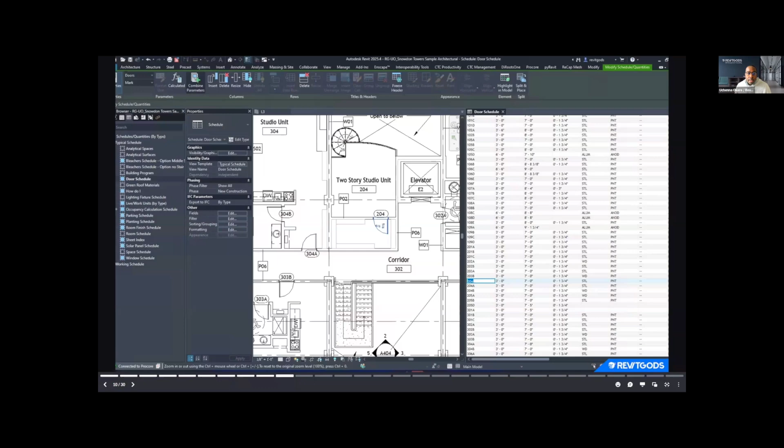So that's, I think, why there's this huge need to have some other tools come into play to make this actually successful. Because realistically, when we're in early stage design, many of you, if you went to architecture school or any form of design school, this is how we think. We normally sketch things out, we're developing things with our hand, we're touching material, and we do a lot of work before it gets into a computer. And then somehow that gets lost when Revit, which is realistically a data management platform, requires us to enter in all this data before we actually can get to our conceptual design. So there's sort of a bottleneck that's been created in the market, and we want to try to help solve a lot of that.

Because realistically, when we look at conceptual design or early stage design, there's so many factors we have to look at when it comes to site analysis, zoning, scope. There's many things we want to consider that Revit isn't necessarily the best at. But what we want to do is try to take some other tools and connect it to our documentation platform.

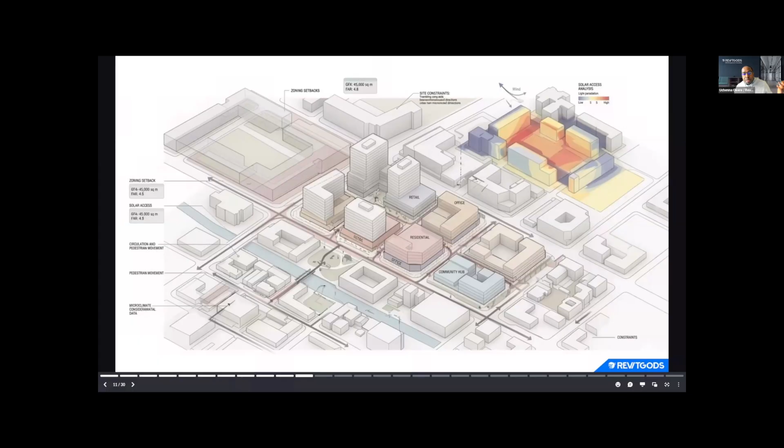Now, the good news is that Autodesk has made this huge pivotal shift in developing this platform called Forma. I went to AU last year, and they kind of hinted at this, but in recent months they took Forma and brushed it over all their products. So it almost feels like Forma is the King, the Conqueror. You see Forma across everything, so it's a little confusing about what Forma is supposed to be. Let me just do a quick breakdown of Forma for everyone here today.

So first off, Forma is designed to be an end-to-end platform to connect planning, design, construction, and operations. There are a myriad of products that Forma provides. Before, each of these products had different names associated with it. Some of these products are included in your AEC collection license already, which is one of the reasons why we thought it was important to do this webinar, because we want people to get the most out of their current subscriptions. So if you have a subscription, Forma Site Design, which we're going to talk through, and Forma Building Design is included in your AEC collection subscription, and you should also have access to Forma Carbon Insights. So these three will be included in your subscription.

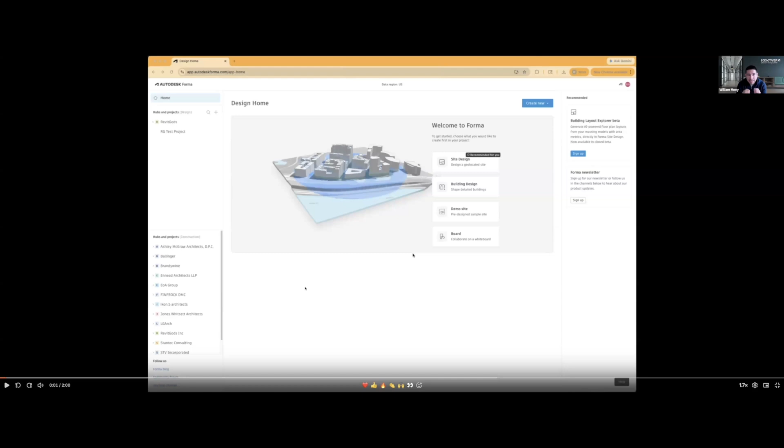While I break down Forma, one thing to note is how to get there. It's browser-based software, so you'll navigate to app.autodeskforma.com. You might have to log in with your credentials, but after doing so it should bring you to this page here.

Site design and building design kind of work together. Once you have a project created, you'll be able to see any of your design iterations located here as well. With that, let's get into site design.

Site design is really going to be more about that urban or master planning, large scale view from a design standpoint. You start off by specifying your general area where you want to place some massing.

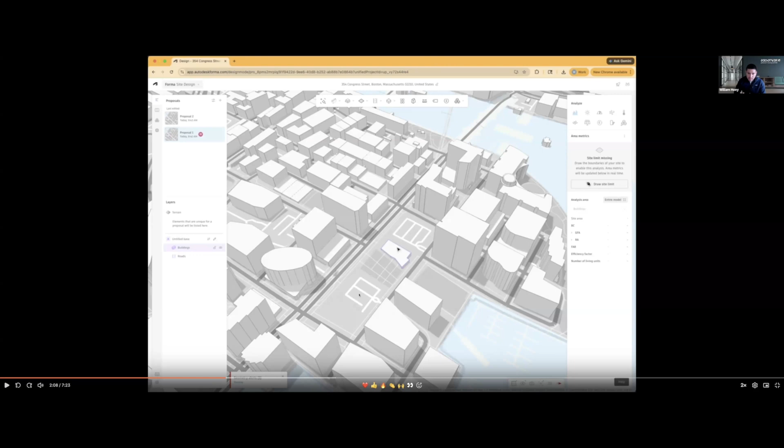One of the great features we'll explore today is the site automation feature, but you also have the ability to just place in some general massing if you want. You can also import various file types, although you can't import a Revit model directly—you'd have to save it out as an IFC file or something similar, just as a heads up.

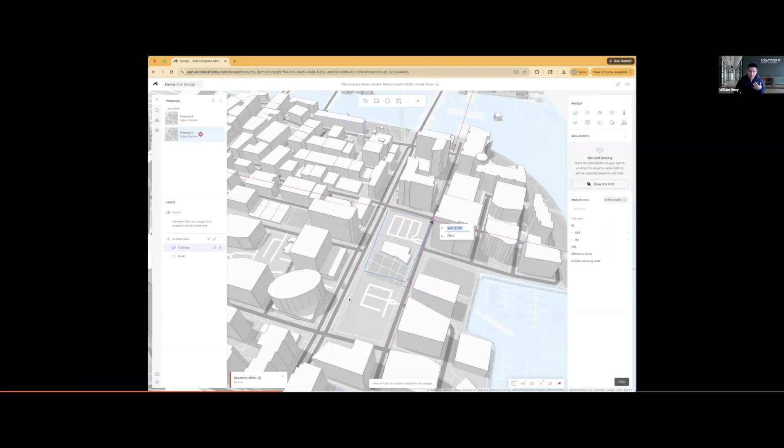One feature that really stood out to me was this site automation tool. The first thing it asks for is your overall site boundary extents—whether you're tracing over a property line or just a generic outline of what your site might be. As soon as you do this, it begins to place options for massing and how the site might break down.

Automatically, with this you can begin to control via the nodes how the shapes of these massings behave relative to each other on the site.

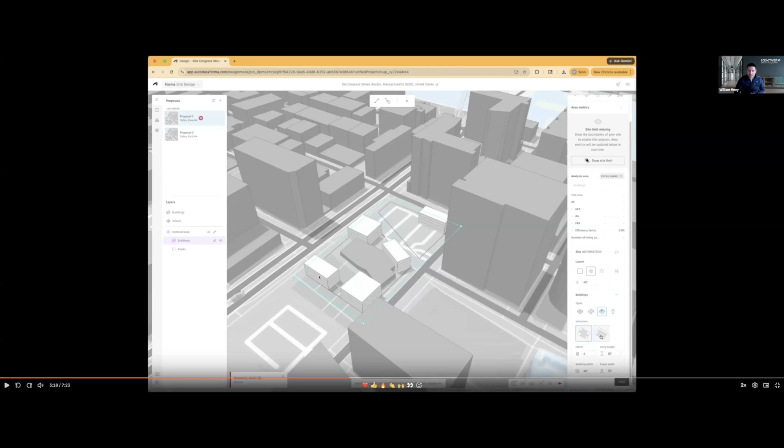You'll also have this panel on the right, which can cycle through various building types that Forma has. It gives you a mixed feature, a longer linear building, a tower option, or a mixed option of the two. You can also add more nodes if you'd like to get even more specific.

Or you can drag any of these boundary or perimeter lines to adjust some of the massing here too. You can also specify the story height, the floor height generally speaking, and the building width—again specifying building versus tower.

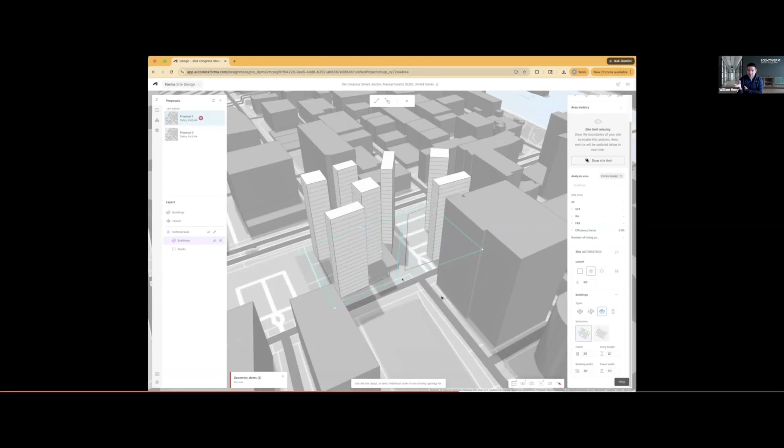Depending on which layout type you choose, you can specify the width there too. So again, it's a really quick and easy way to play around with various automated massing on your site, just to see what some options might be. Of course, you can always choose to be more precise by creating individual massing, which gets more into the building design aspect that we'll discover momentarily.

Another cool feature of Forma site design is that it comes with a lot of analytical tools. We have things like daylight analysis, microclimate analysis, solar energy, a shadow study, or even noise reduction or noise analysis as well.

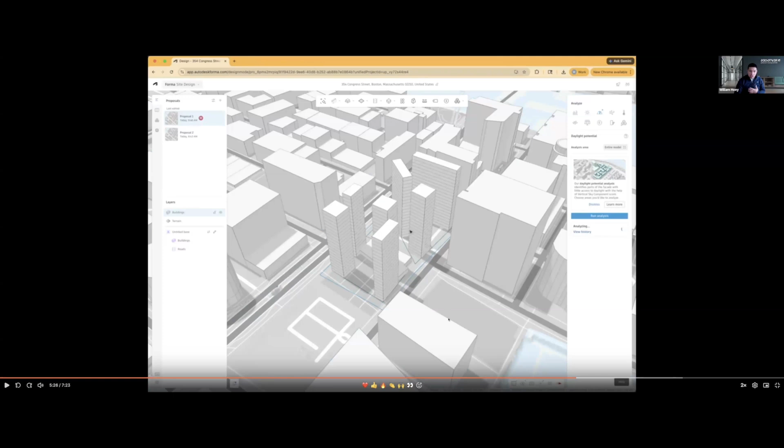For this one, I'm actually going to be running a daylight potential analysis. It usually takes a pretty quick amount of time to run. Once you have it run, it brings up this separate window, which you can orbit around, and it applies a color scheme or color legend to the various massing here.

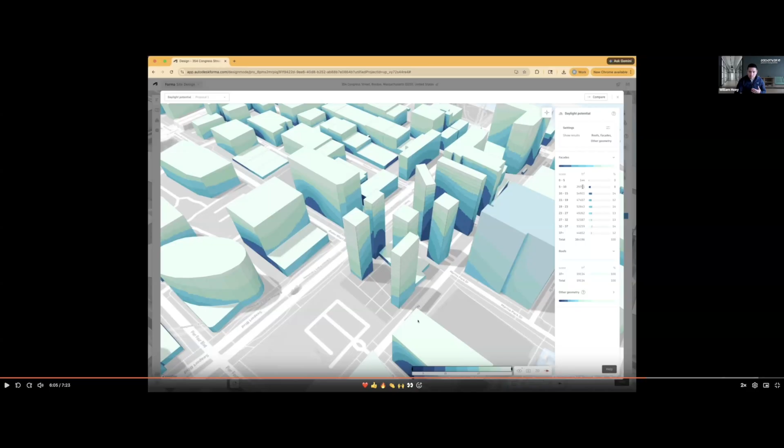The dark blue, or the darkest blue, is the areas of the massing and surrounding context that would get the least amount of daylight. Of course, the lightest color on the gradient scale is the one that would get the most sunlight. It gives and assigns this kind of predetermined score, which was a little bit difficult to understand at first, but once you start really playing around with the massing, you can dial in what that score might be for those various areas.

The other piece to this, which I found really great as well, is that you can also implement a very quick shadow study. Not only can you specify the day of the year and the time of day, but you can also specify the frequency in which you want it to capture the shadow study itself. Apart from that, you can also export each time increment as an individual image.

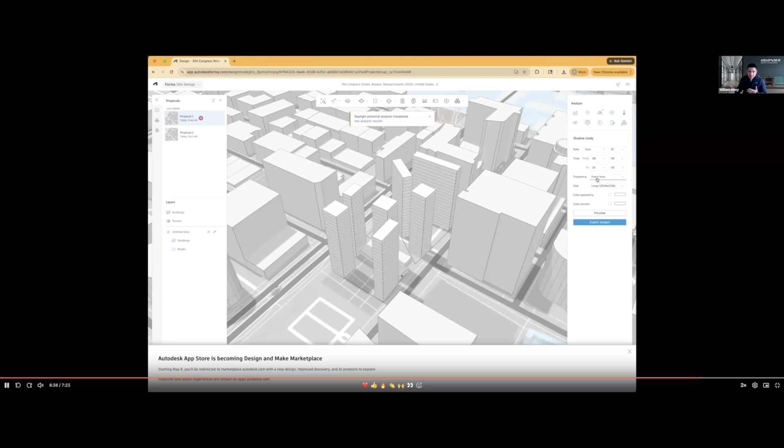For this, I'm just going to use the preview option so you can see it cycle through different times of the day. But again, each of these individually can be exported as images, so you can really have something to export out, whether you're doing a presentation in InDesign or other third-party software. It's a super useful tool here.

So those are some of the bigger takeaways of site design itself. But let's also get into the next big piece to this, which is going to be building design.

In order to cycle through from site design to building design, you can go to the top left and click on where it says Forma site design. It'll cycle through to building design to switch over. You'll notice that the massing actually stays with me, along with my context and my roadways. Everything that I had generated from site design also works and gets converted over to the building design as well, so you can easily switch back and forth once we have created this building in building design.

We can also then switch back to site design to further analyze, do a shadow study or two, some daylight potential, and go from there.

The great thing about building design is that you can also carry over your proposals, but you also have more architectural elements or components that you can apply to your massing. So you have things like doors, walls, balconies, windows. You can add in some site-specific trees as well.

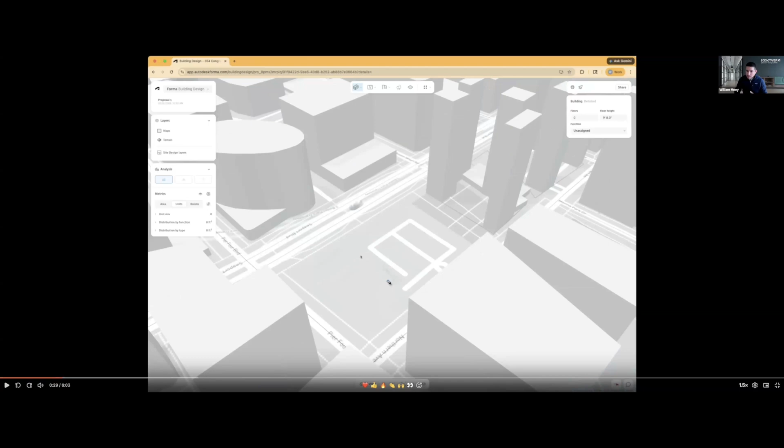But really, when you are going to be creating your building, it gives you three different options. The first is going to be generic, but you also can do residential or office. The reason I bring this up is that we'll be talking momentarily about modules. For this example, I specified a residential kind of building type as the building I want to be applied once I finish my massing.

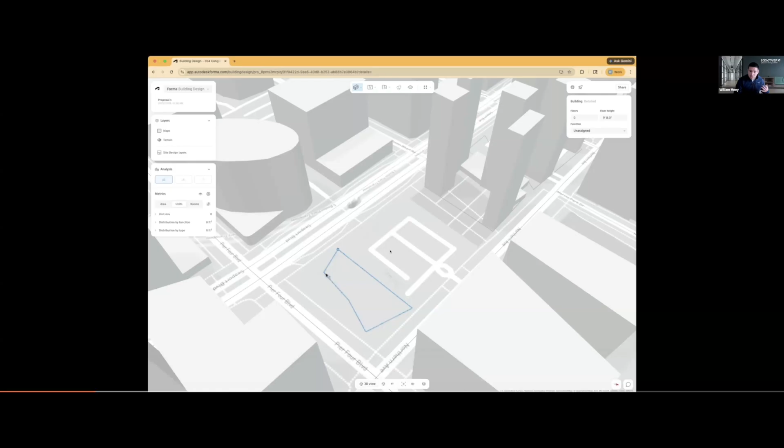And we'll see exactly how that turns out once I create this massing here. Now, to create the massing, it's kind of similar to that building automation itself. I was able to kind of just trace out a perimeter boundary for my building, not my site, but my building. And once I hit enter, I was able to drag or hover over and extend up my overall building here.

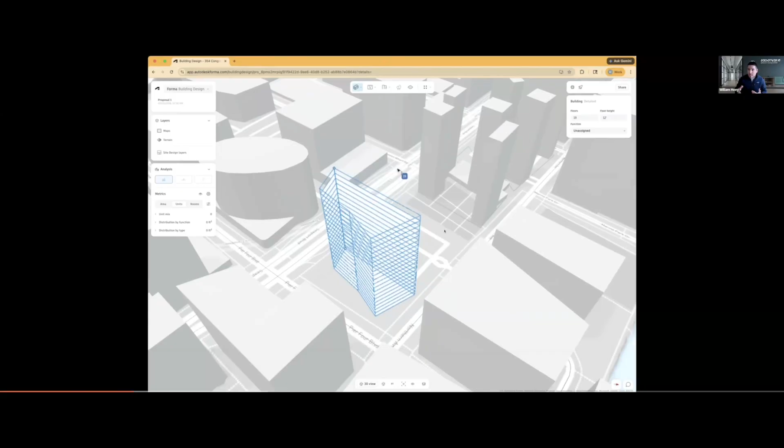I can specify on the right how many floors, the floor to floor height. But as you can see, my residential building has already applied these modules to it. And these modules are something that you can create, set up, and determine yourself, and apply yourself to these various massings that you create.

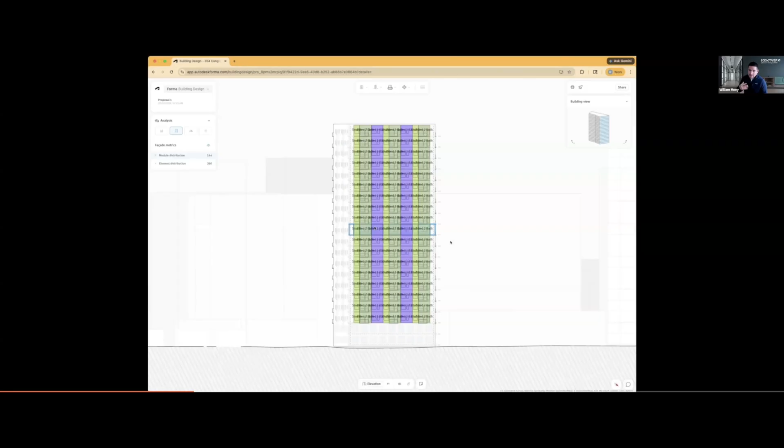And to do so, it's more about cycling through these different views that building design gives you. So, for example, here I have floor plans and elevations. I'm going to select an elevation view. You can double click on the side of your massing, and it'll bring up an elevation view.

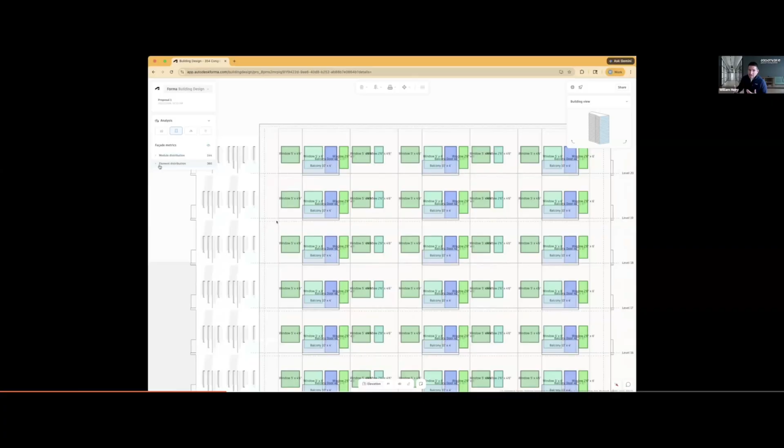And you can see that it's giving me already a kind of module distribution, so I can see right away, hey, these are how many studios I have versus two bed, two baths versus one bed, one bath, all just by the facade breakdown here. It also gives me some type of element distribution, so I can see how many 5x6 windows I have on this facade, and how many I have overall in this project. You can get some really great data just from a few clicks when you generate the massing itself.

You can also toggle through other elevation views, and again, we can really just focus in on these modules here. Now, the modules themselves can be renamed really whatever you would like. For this, because it's more residentially geared, it makes sense to do it more as the unit mix breakdown.

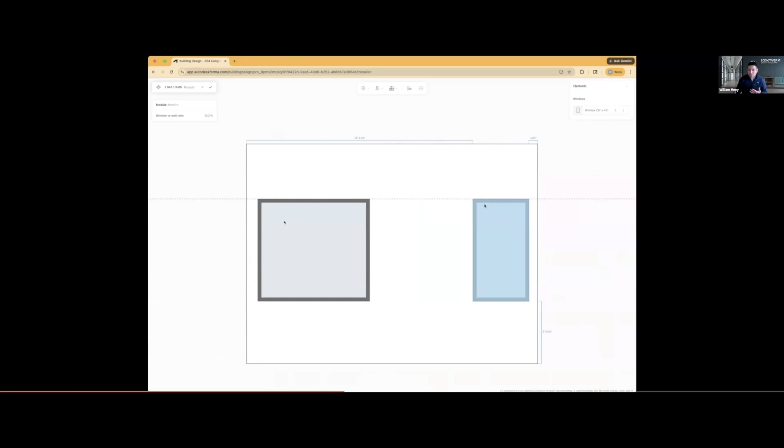But let's say that we want to adjust some of how these modules are laid out. You can simply select the module, go to edit, and it brings you into an even more focused interface where you can apply or add various architectural components directly to this module itself. So if I wanted to say, hey, every one bed, one bath also gets a balcony, or maybe it gets a third window here, I can then bring in that component and apply it.

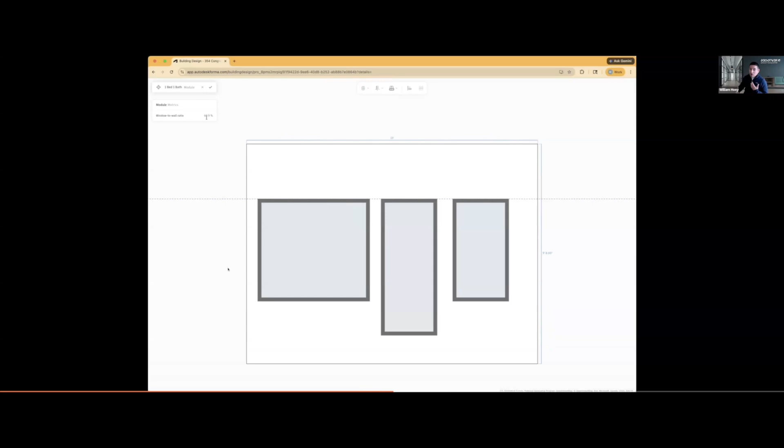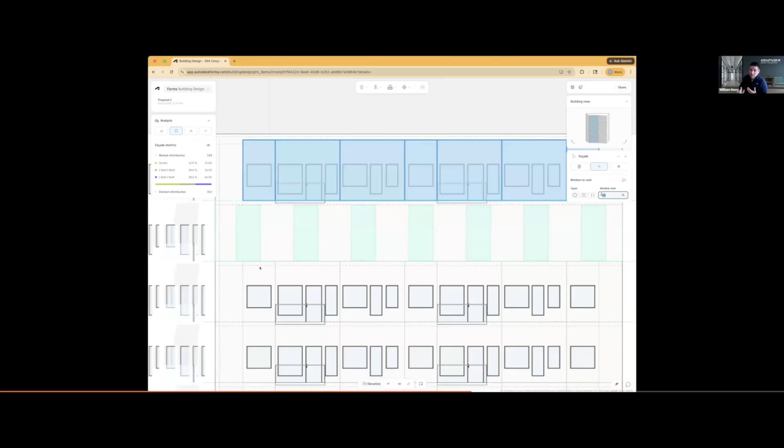And then once it is saved out, it'll automatically update while providing me a window to wall ratio, it'll automatically update on my facade for me. So again, it's nesting in those various modules there. It's super helpful to use, pretty intuitive. Generally speaking, this is more of a drag and drop type of software. Once you get the lay of the land, it really is helpful and pretty quick to use.

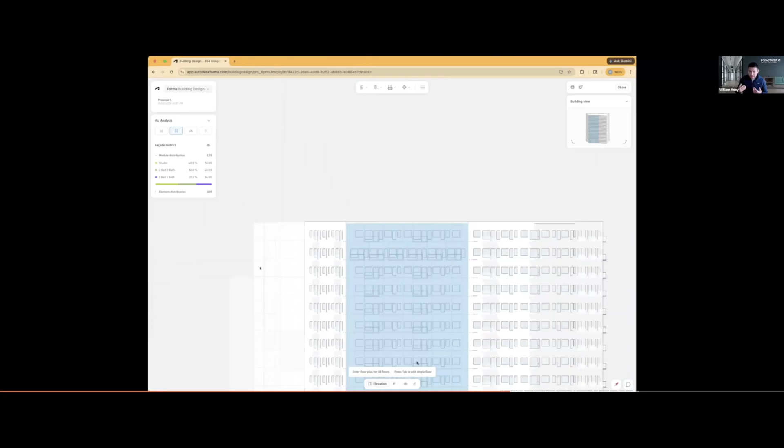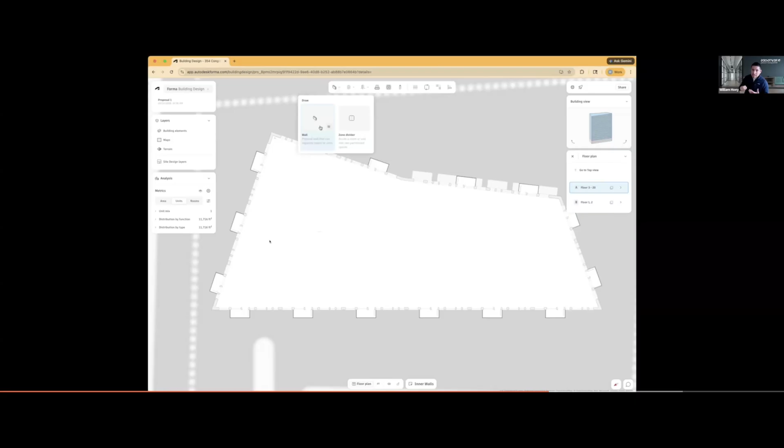The other piece is that you can also create and generate floor plans directly in Forma. So again, remember how I said that we can create and drag and drop building components? Well, walls and interior walls are another piece to that. So in my floor plan view, I can just click once, click again, similar to how Revit works, and I can begin drawing generic walls in my building.

I can also place and add a few doors in here if I would like to. And as soon as I do, again, very similar to Revit, I can just click and move and modify the wall as I see best. So you can create some floor plans here.

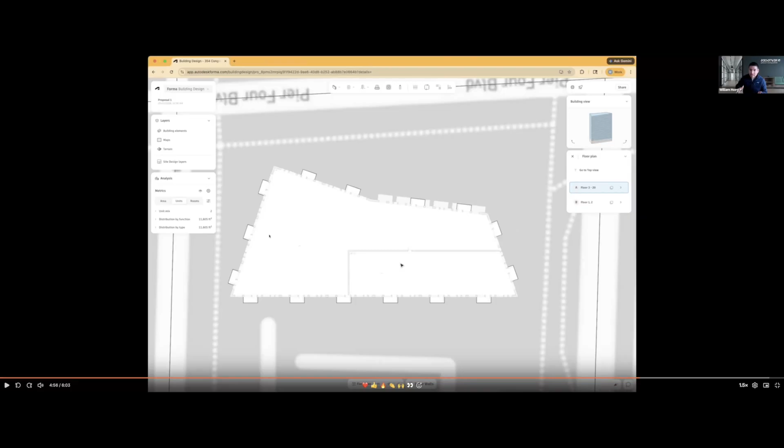And as you see on the far right, the floor plan that I would be creating can apply to more than one floor. So floor 3 through floor 20 is what this layout would be. I could specify individual floors if I wanted to for custom floor plans, or if I want to apply a singular floor plan layout to a tower like this to get some quick data for unit mixes and things like that, I also have that ability there too.

But the best piece to this is that I can have this all done fairly quickly. And of course, I can always pop back to site design, but I can also export this massing that I've done directly to Revit. So again, there are some limitations for the importing side, but for the Forma building design piece, you have the capability to export directly to Revit as well.

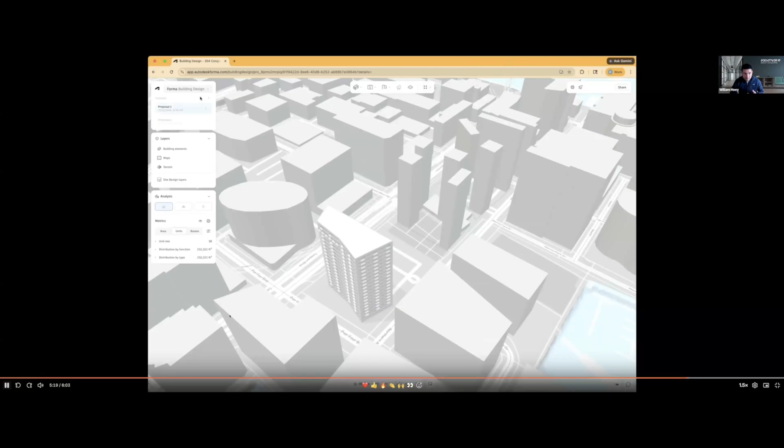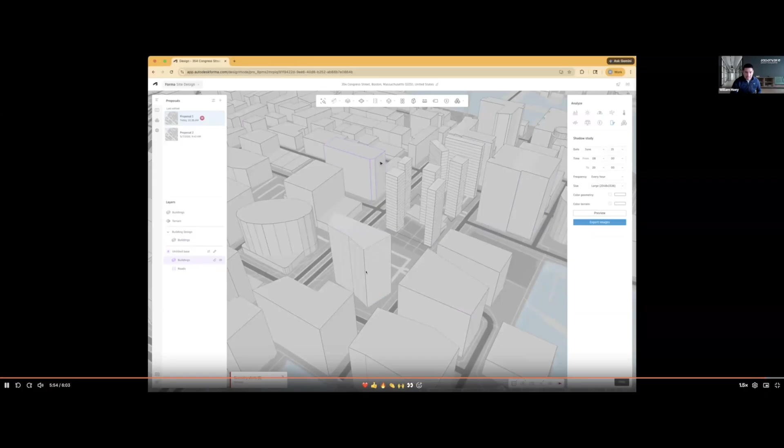And of course, you can always pop back to site design here, like I mentioned, and once you do, you can run all of those analytical pieces again. So everything works harmoniously together in this Forma workspace. Here's just a quick shadow study of that new building massing as it relates to everything else I created previously.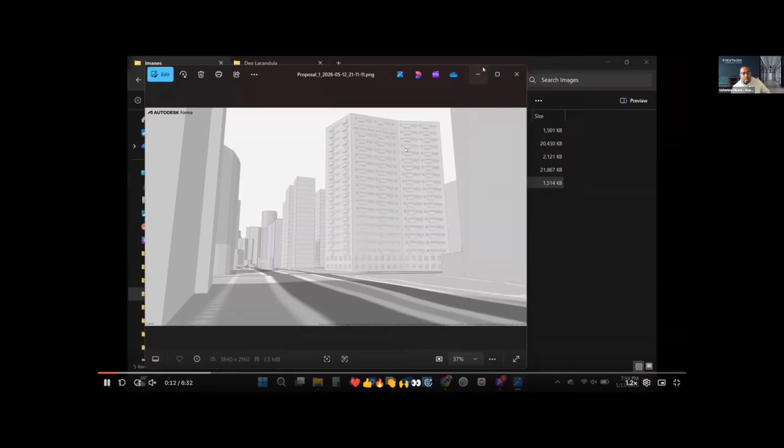So let's talk through a workflow. I have one set up here. We're going to take an image set up inside of Forma, and for context, this is downtown Boston. So that building we've set up, we're going to drag and drop that image into Gemini.

I'm going to write a pretty simple prompt and tell Gemini, hey, render this image, but maintain the aspect ratio, which is really important because Gemini has a habit of completely changing the aspect ratio to try to give you what it thinks you want. So we'll hit the render button on this image and see what it comes up with.

All right, so it's going to give me what it thinks I need. Now, this is downtown Boston, so I want to give it more context.

I'm actually going to go to Google Maps and type in that exact address, 103 Seaport Boulevard. I'll drop my person in here and try to get around exactly where that shot is supposed to be.

Now, when I ran this the first time, I made a rookie mistake. I'm going to take a screenshot of this screen and give it to Gemini. Now, again, Gemini doesn't like too much information. I want Gemini to first update this road condition, and I wanted to use the Google Map reference to do that.

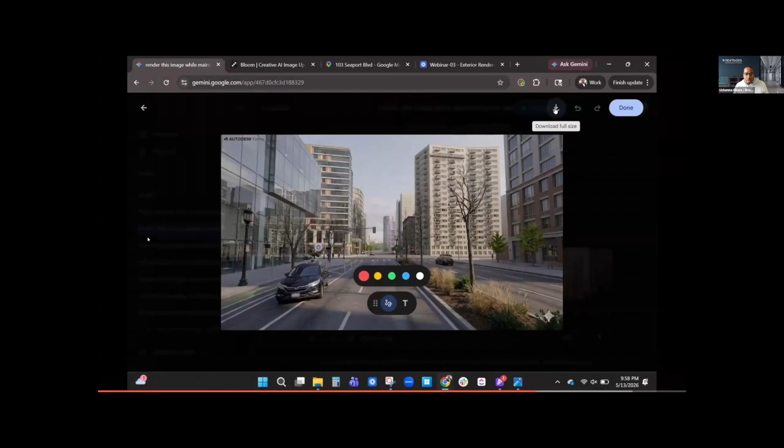Awesome, it got rid of it. So my image looks pretty good. Now I'm going to save it, then pop it into Topaz.

Topaz has several tools. The main one I'm going to use is called Bloom. So we'll pop it into Bloom. Topaz, if you've never used it before, it's a pretty awesome tool.

The key thing is, usually the renderings that come out of Gemini are going to be at a lower resolution. So we use that image and can do further cleanup, like maybe removing this Autodesk Forma logo. What Topaz is going to do is upscale the whole image and blow it up to 4K or even 6K, and you basically set how much you want to alter this image.

Now, the key thing we want with this image, and this is important, is that with most AI tools, when you ask AI to either blow up an image or enhance it in any way, what it likely does is change the image.

We don't want to change the image at all. We want to keep this image exactly how it is, but enhance it so that we can get further use out of it, or use it in a presentation or some type of marketing collateral.

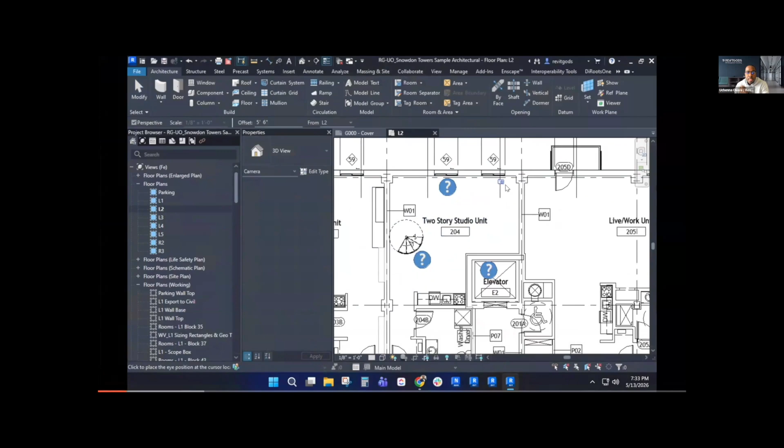So we'll go into Revit and I'm going to take a camera and just take an interior shot of a unit. This is my Autodesk sample project. I want to get this studio apartment, this two-story studio, and maybe snap an image for some marketing collateral. Now, I'm going to be pretty lazy about this. I'm not going to export the image, I'm literally just going to screenshot it. We'll keep this easy as pie.

So we'll copy that, then open Gemini and literally plop that in. Now, Gemini and most other AI platforms will give you these presets. The presets are basically pre-prompted images, where you're pretty much telling the platform, in addition to whatever I give you, add in this other prompt that'll make this image look cinematic.

So I'm going to go with the cinematic one, copy and paste my render, and tell it to render this image but maintain my aspect ratio. All right, so we'll do that. It's going to think for a bit, and boom, here's my image.

Now, it did cheat a little bit because there's definitely not two windows. Well, there's one window in my shot, but it added a second one. So you do have to be kind of strict with how it treats light, and say, hey Gemini, get rid of that window, it doesn't exist. But I would say this is a pretty good one-to-one of the shot that I originally gave it.

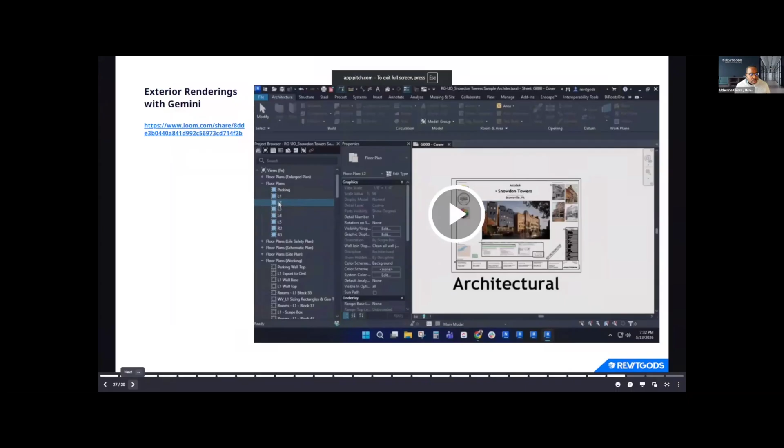So what are the final thoughts here? Because we showed you Forma, we showed you some workflows with Gemini, how those generally work. And one of the things that we see and understand about these tools is that it's given teams this incredible ability to iterate, adapt, and communicate ideas much quicker than they ever were able to. And if you're watching this and seeing this for the first time and thinking, man, I would love to take these workflows back to my office or incorporate it into our workflow.

The first thing I would recommend is to just play with the tools and see what you get out of it. Develop your own process for it, your own workflows for the tools. See what you like, what you don't like, and then once you have a general level of comfort with what you're using, the next part is to figure out a way to standardize it to make it repeatable and scalable. Now, that's obviously something that our team at RevitGods can help with. We are masters at developing BIM standards and workflow standards for design technology.